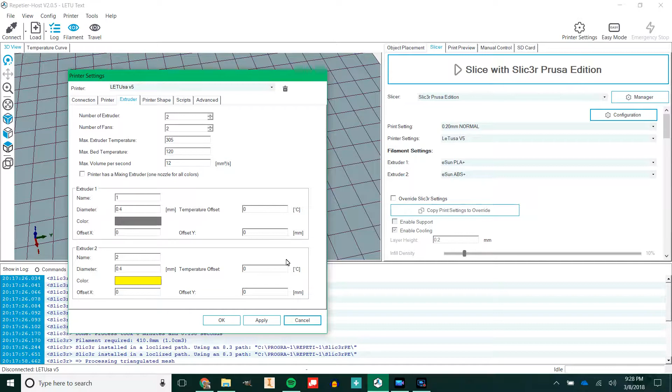Over here I usually go and set inside my slicer panel whenever I have a major system change. I go to printer settings, and I go to my second extruder, and I have an extruder offset. There's going to be a positive difference between the centers of the extruders. You can get as precise as you want, but as you can see, whole numbers work just fine for me.

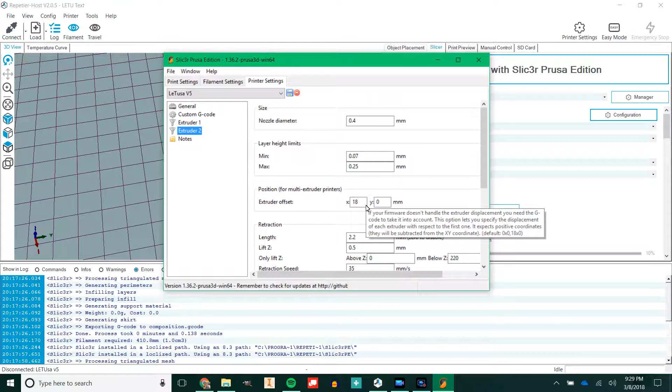So that's how you set that up, and you'll need to set a different color there as well, or else it'll be very hard to tell what filament is printing what.

So let's go ahead and add a dual extrusion print. Whenever you make these things in Blender, Autodesk Inventor, Fusion 360, or SolidWorks, of course the eternal favorite, you will need those pieces to be in assembly, and you're going to export the assembly as pieces.

Alright, so you'll just delete the parts of the assemblies that you don't need. That way they're always in the right place, because that's how RepetierHost and Ultimaker read the file.

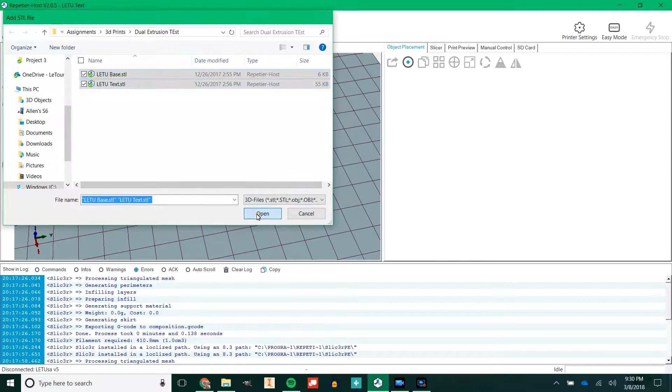So this was an assembly that I took apart, all the pieces one by one in their positions, and I'll just bring these in here. So it'll bring them in separately. Don't freak out, they're still paired together and know where to go.

So you simply select one of them and you drag them together. And there they are, now it is one paired. It's exactly as it was inside of your CAD program, whatever that may be.

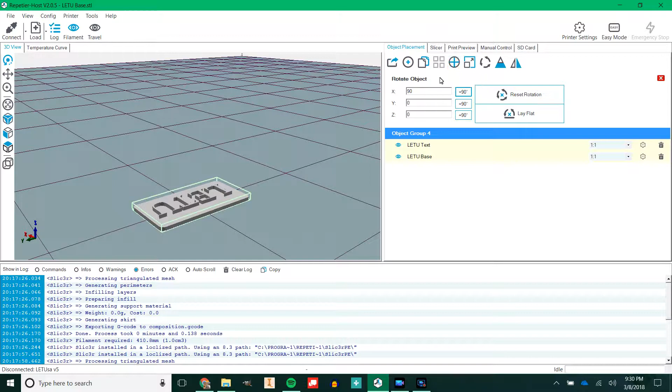And so we'll go over here. We'll reset our rotation and center it. We'll rotate it for good measure. How about 90? Why not?

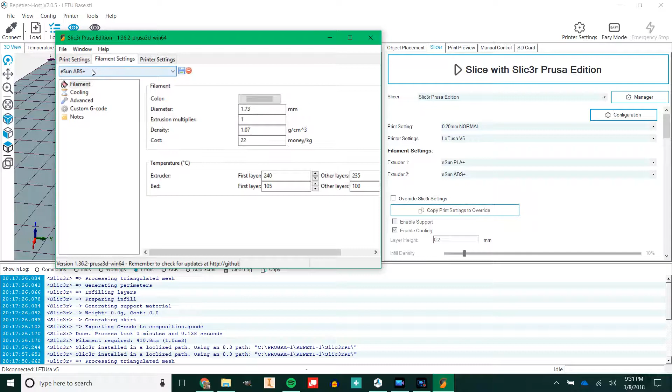Let's go over here to our slicer. You'll want to make sure that you have your extruder filament type selected over here, the correct ones, and make sure your settings in your filament accordingly are correct. And you have your color selected for each so you can tell them apart.

Alright, and over here, after you check that, you can select which color. So I want the text to be my yellow filament. Yay, doesn't that look nice?

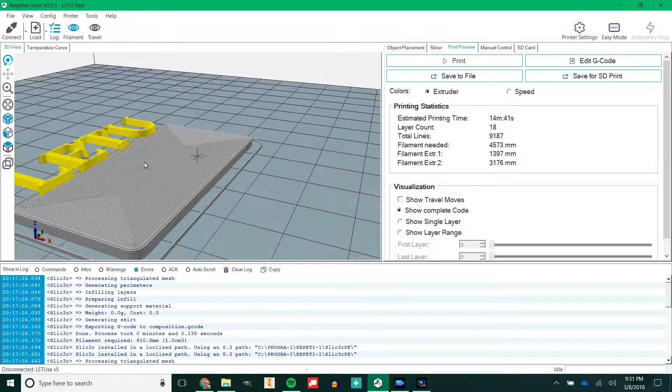So whenever we slice this, if you did it right, you'll notice that the filament that's on that second nozzle is going to be offset constantly. And that's okay, it's going to look like it's going to print in air, but remember, it's that far off.

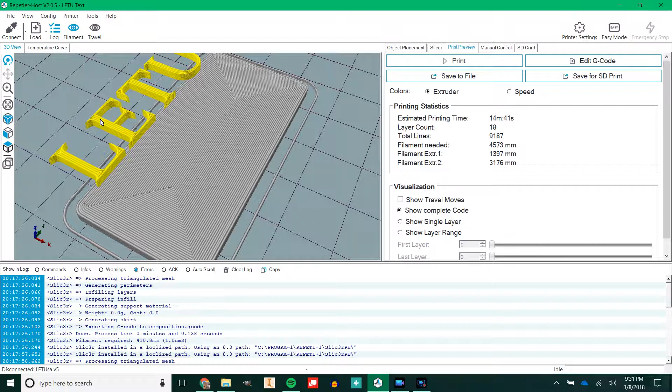While the nozzle, your main nozzle, would print this right here, it's all going to shift over, and so then it's going to have to be further out in the program, if that makes sense to you. And so then it'll just print on top, and it'll be beautiful and nice.

So I hope this helps you get started with 3D printing dual extrusions. If you have any questions, of course you can email me, or you can test for yourself. It all depends on how you learn.